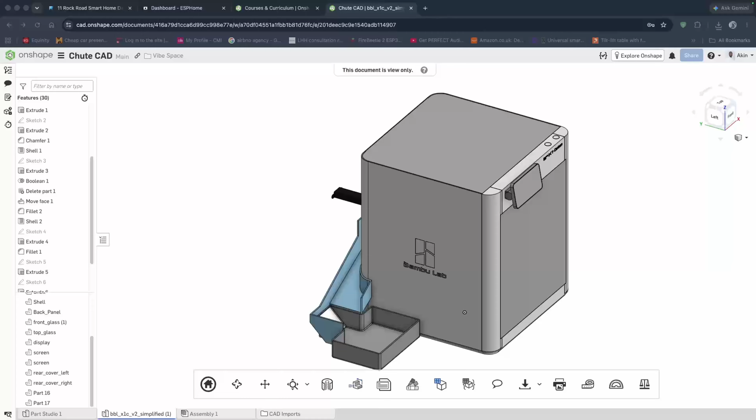In this Onshape tutorial, we'll be creating this XS Filament Chute for the Bambu Lab X1 Carbon. It's going to be a two-piece design with a collector basket and the main chute that magnetically attaches to the back of the 3D printer. So join me as I walk you through how you create a model like this in Onshape.

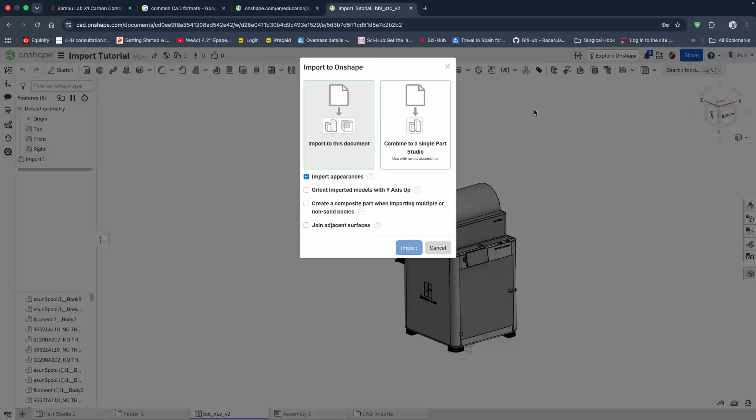So to actually import the folder, we're going to navigate back into Onshape now. Once that file is downloaded, we click on the plus button, navigate to the file we wanted, and Onshape brings up an options window. What you want to select here is 'combine into a single Part Studio', as that's the simplest thing for you to do. This combines all of the parts into one single Part Studio.

Those three tick boxes there, I would say you can probably ignore. Sometimes I like to click the third one, 'join adjacent surfaces', when I'm downloading a PCBA, because those tend to have a lot of little parts, and it helps to shrink it down a bit. Otherwise you might end up with thousands. But none of these three are important in any way. You can click the first one if you have a color that you want to bring in.

What you need to do is click import, and you can see the little bell shape there as Onshape is working and importing that folder. And now that file has been imported, and you can see it here. This is the STP format.

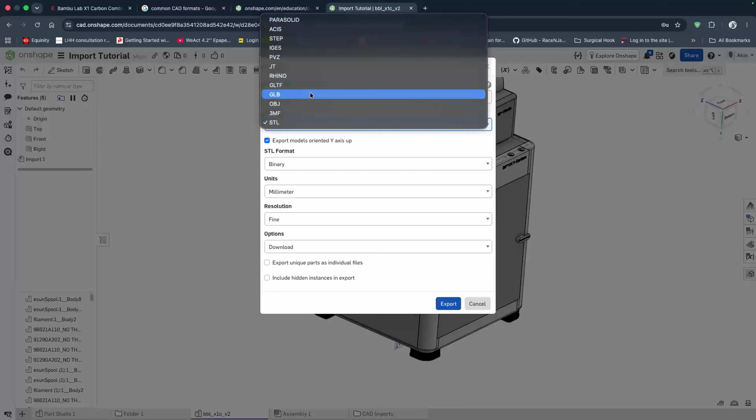To illustrate what I was talking about earlier, I'm going to export this out of Onshape by right clicking on the tab and clicking export, exporting it as an STL. I'll select Coarser for the resolution, export that out, and then import that back into Onshape as an STL file, just to demonstrate the flexibility you get with these two file formats.

So I'm going to click the plus sign again and select the STL file. You can see the difference in the file formats here - the top one is STL, the bottom is STP. You click import, and Onshape gives you a more limited options window this time, which is pretty much just to select the units. I've already deleted some of the parts I don't need on my STL file.

To do that, all you have to do is right click on the parts in the Parts section, right click on the part you don't want, and click delete, or select it and press delete on your keyboard.

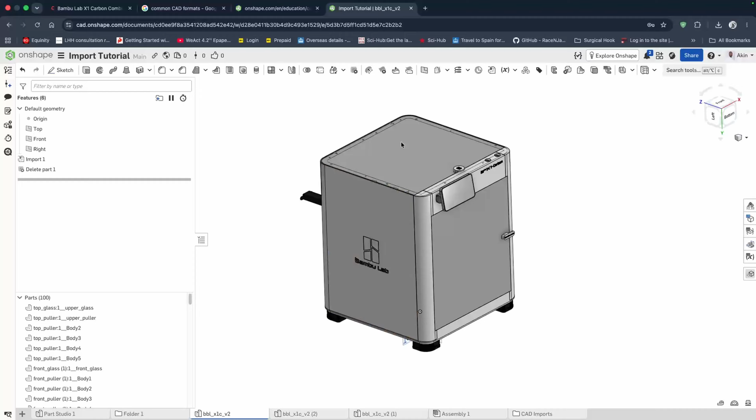So as you can see now, this is just a mishmash of triangles. There isn't really much to select here. I've selected sketches, and the only thing I can really select there is just the planes. I can't select any of the faces to do any sketch against.

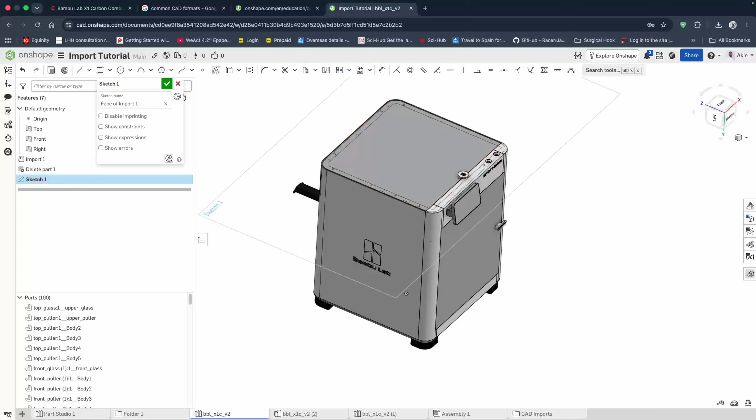If I go back into the STP file, you can see now that all of the faces here are selectable. So I've just created a plane and I'm about to create a sketch on that top face. I'm going to project a sketch on one of the features there, creating a circle out of that handle, and actually draw a circle on the top and extrude it.

Just showing you some basic features, a basic demonstration here. As you can see, I'm able to actually sketch off that surface and make significant edits to that part. And you only get this by using the neutral formats I talked about earlier - STP, IGES, and Parasolid. If you want a lot of flexibility, I would say avoid STL files.

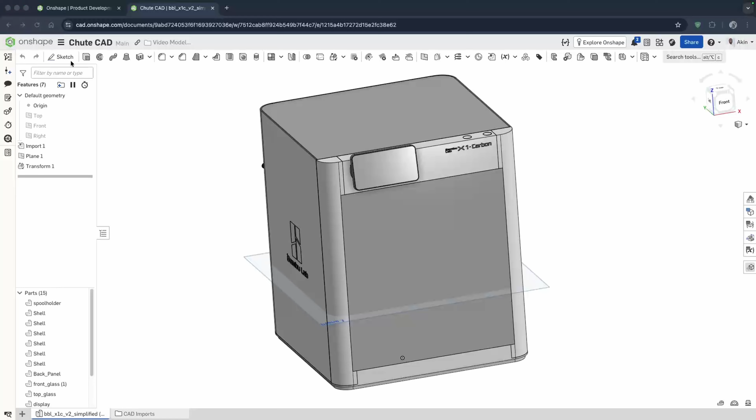All right, let's get back to the modeling. All right guys, let's get into this. I will be using an existing model of an X1 Carbon here to actually start off my sketch.

So I've offset this plane here by about 150 millimeters, from 50 millimeters from the bottom of the printer up to roughly where the position of the chute is. And I'm going to use the project sketch feature here to actually map out the initial edge radius of the printer.

What you're going to see me do here is offset that by about 1 millimeter - or is it actually 0.5 millimeters, actually looking at this now - to map that so it's not on the same plane, not on the same position as the actual printer. But I think I will change that later on, let's continue.

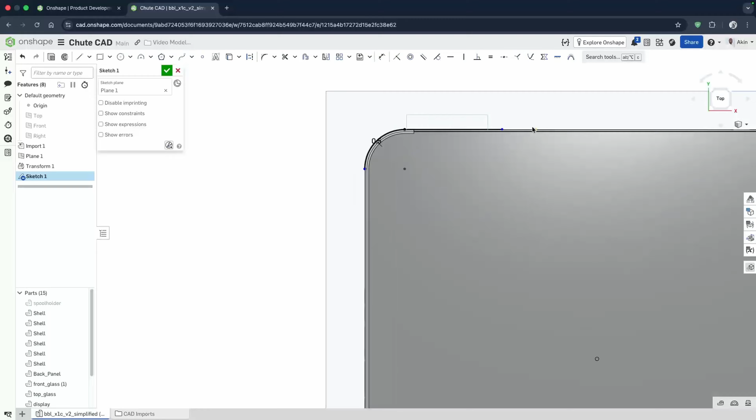Then I'm going to set up the initial chute sketch for that side. So I'm placing my dimensions - I'm on this channel, I'm big on constraining your curves, right? We don't want to see any blue lines here or any blue dots.

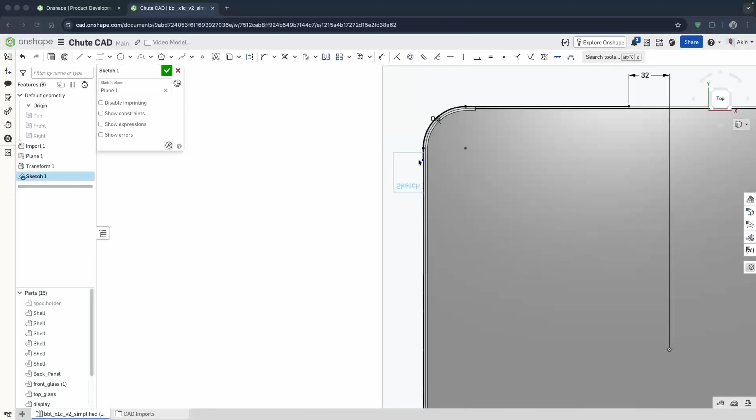That's been set up right now. And then I will put in an offset tangent there. So now I need one more to actually map the vertical position of that point, which I've done to be about 151 mil from the origin.

I'm placing both of these dimensions from the origin. Next thing I'm going to do here is just draw that out roughly to the position where I want that to go. So the chute itself is probably going to be about 140 mil away from the printer, right?

That distance represents not the final width of the collector basket, but where the collector basket will interface with the chute part. So that's what that means - I just need a bit of space there.

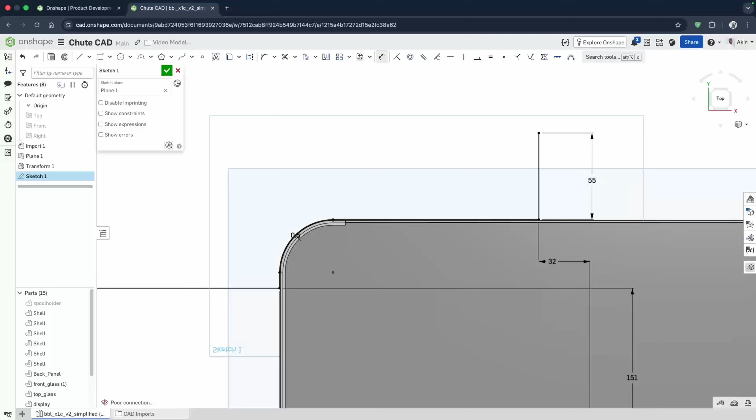So I'm still working on the sketch for the chute, and then I'm going to try and close this off now. I would use a horizontal constraint there to make sure those two points are level. And now I will close that off for a fully constrained sketch.

Next thing we're going to do is extrude this down all the way to the bottom of the printer. So I will extrude up to the face here. You can actually see as I rotated back here where I actually placed the plane of the cuff, of the sketch - it's just right at the bottom of where the chute ends.

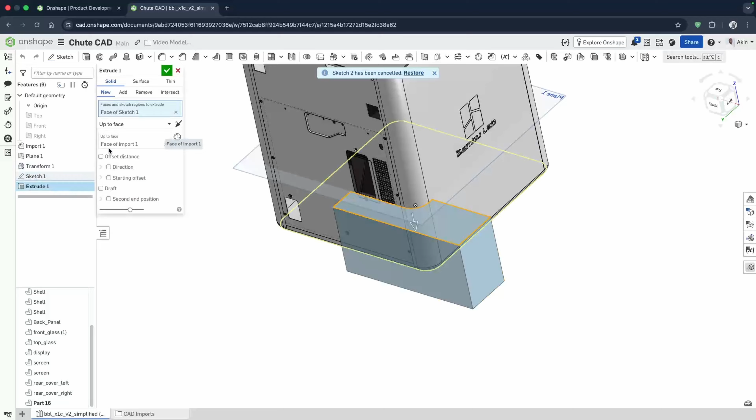So yeah, but I actually also want that to go kind of up and down that. So I've added a second direction to the extrude to actually go roughly to the upper third of the chute.

Next thing I'm going to do here is set up and extrude a sketch that I can extrude cut off, but that kind of gives me the slope that I need. So you can see there's a slope to this line here.

Over the next couple of moments, I'm going to be constraining that so it is fully defined. And then what I will do is extrude cut that up to the face of the printer, and that gives me the slope for the chute.

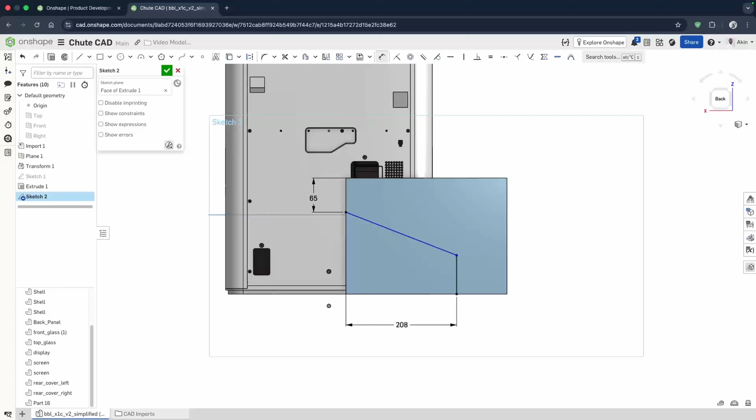So I'm placing my dimensions right now in the right places. I think I need an angular dimension here, which I'm about to do, or which I will do soon after I've placed the height. Actually, okay, I didn't go with an angular dimension - I went with just constraining the heights here, and that again gives me a constrained curve.

So I'm now going to do the upper part of that chute. What I've done here is I've placed a parallel line, so the two chute lines are parallel to each other, which constrained that line. But I have two lines because there's an upper part and a bottom part to the chute.

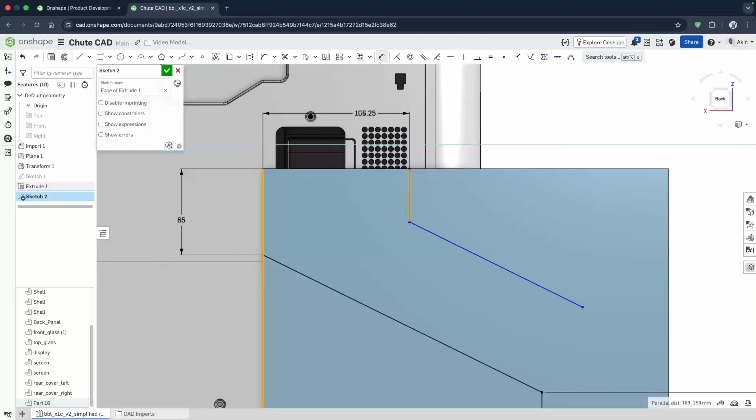You don't actually need that whole block that I've currently drawn. You could have achieved this with a chamfer on both edges of that block, but I'd like to, as much as possible, work with sketches because I feel like I can control that a little better.

Right now what I'm going to do is finish completing this curve so that I'll have two complete enclosures on the original extrude. The idea is that what will remain is just the areas in between the two regions of the sketch itself. So that's the plan here.

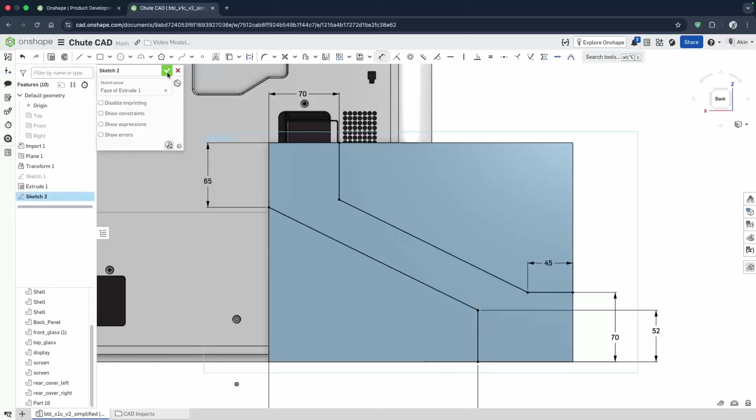So I'm just constraining those curves now. I think I might make a modification on the original one - actually, I didn't. Now that those are closed, you see the two areas at the top of the curve, so I can extrude cut that all the way to that surface, which leaves me with just the main body of the chute itself.

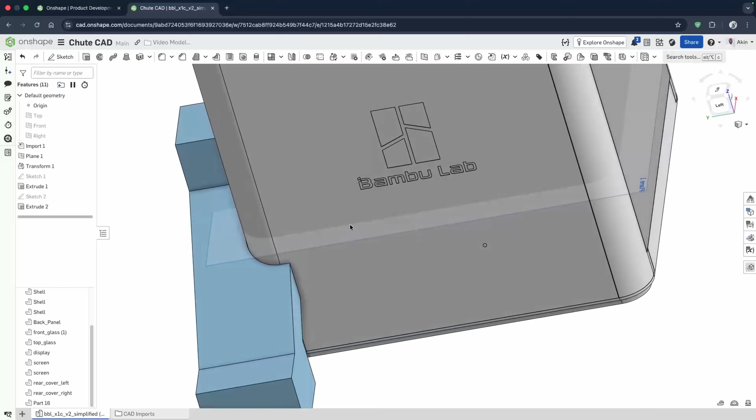Now that I have the block shape of the chute, I need to create the internal channels of the chute itself. To do that, I'm going to use a shell feature.

But before I do that, I'm placing a little chamfer - you see where I'm placing it now at that edge there. That chamfer is where the collector basket is going to merge, it's going to meet the chute. I place that first because I don't want to do any internal chamfer afterward to match the outside chamfer, which is always important when you shell.

In hindsight, I think I probably made this shell a little bit early. I should have probably completed all of the outside of this block before actually creating the shell, but I didn't meet some of my rules there. But now I've done the shell.

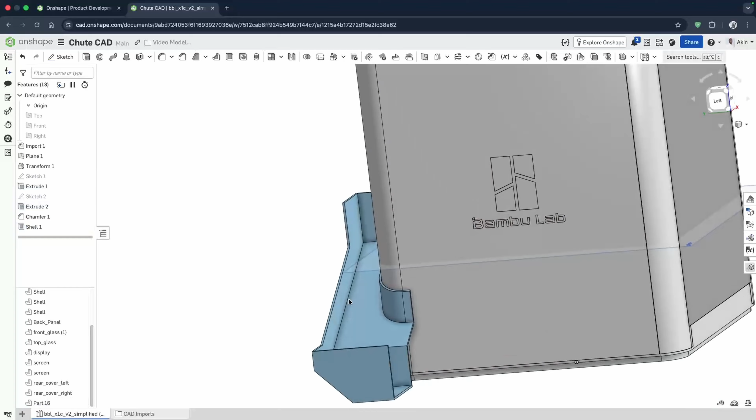Now you can see the internals of the chute itself. I've just dragged that variable up that I created for the wall thickness so I can easily change it on the other part, and dragged it to the top so it can now be used in the shell feature. I've just added one last part there as part of the shell feature.

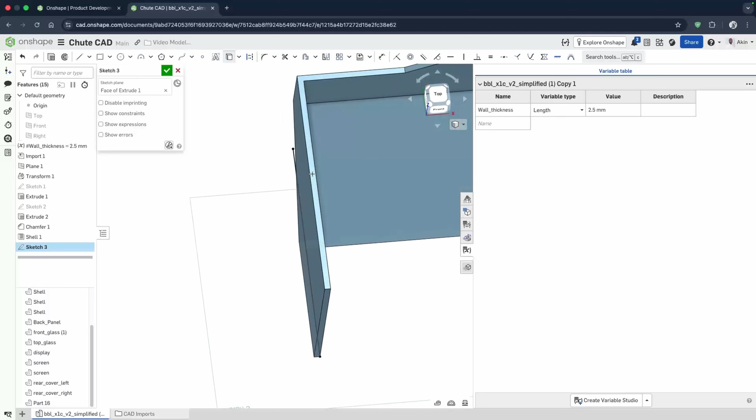So now that that's done, I can start creating the part for the collector basket. I'm going to draw a rough shape of what the collector basket looks like. As I mentioned, the collector basket is going to have a chamfer that matches that internal chamfer there, but I'll walk you through how to create that.

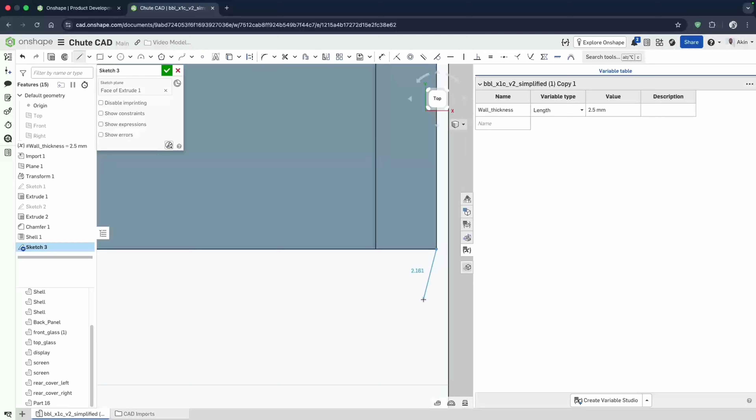The first thing I'm doing here is creating the sketch for that second part. I'm creating the rough shape, getting it all the way to the end of it. I've zoomed in here so I can capture that edge of the chute part.

Now that that's done, once I've done that, I don't actually need to constrain - actually, I needed an additional constraint, so fine, I suppose I needed to in that scenario. Then I'm just going to create the rest of that sketch there. So that's done, I've completed that all around.

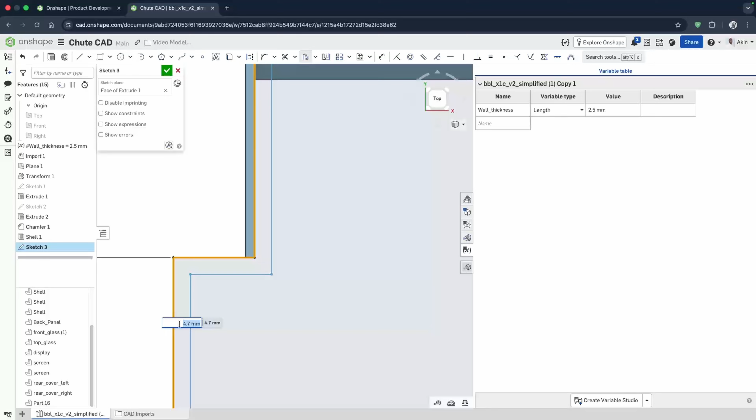Now I'm going to give it a size so I can constrain this sketch. I'm not sure how big I want this to be - I think I changed this a couple of times through the design. I can't remember the final dimension I settled on, but this is based on your table and the amount of space you have, so use whatever size is comfortable for you.

What I'm doing now is offsetting that initial sketch I made, because I want this to fit inside of the chute part itself - where that chamfer is, I need the collector part to fit in there. I've given that a good offset, about 1 millimeter, so I don't ever have to worry about that not fitting, because these are big pieces of plastic, right? So you want to guarantee that as much as possible.

Again, because I created that downstream of the sketch, I have to move it upstream of the sketch so that I can actually call that feature there. I've addressed this topic in previous videos when you're using variables in Onshape. So now that allows me to actually create a block extrude of the collector basket.

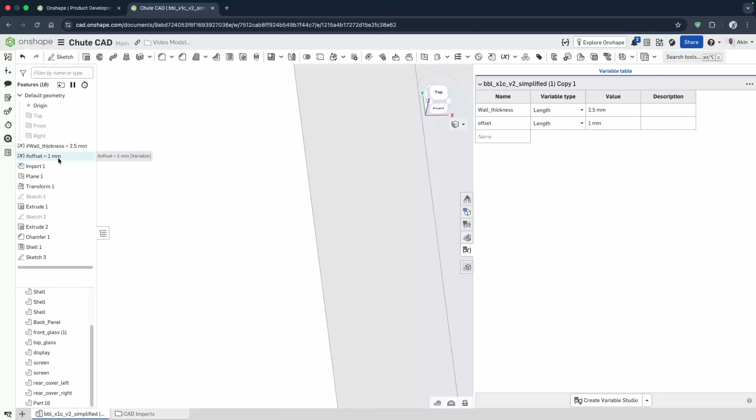What I'm doing is just renaming some of my sketches, because that's one of the things you should always do, as it allows you to find your way a little better. I'm just going to quickly rename all of those 3 sketches there. Up to you, you don't have to do this step, you can just ignore it if you want.

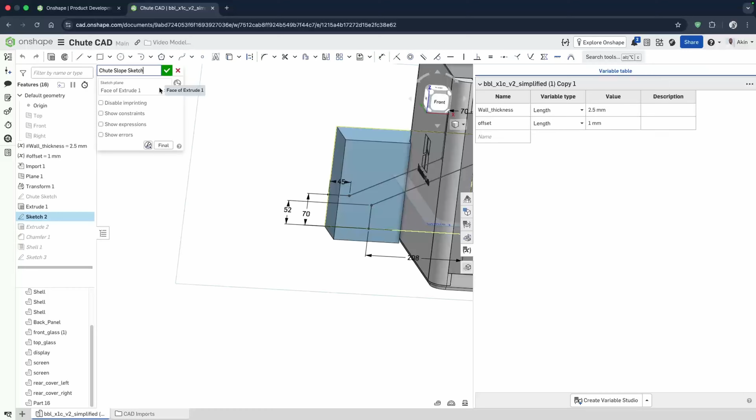So I've renamed the first one the chute sketch, and this is the sketch for the slope of the chute, and then I'm going to rename this last one the collector basket. I can't remember what exactly. Okay, I did give it collector sketch, so that's that there.

By offsetting that initial sketch that I made, I can pretty much guarantee that this is going to fit inside of where I need it to fit, and I don't have to worry about any interference being too big, because that's a massive piece of plastic. So I want to guarantee that it fits. So now I am just extruding the rough shape for the collector basket here.

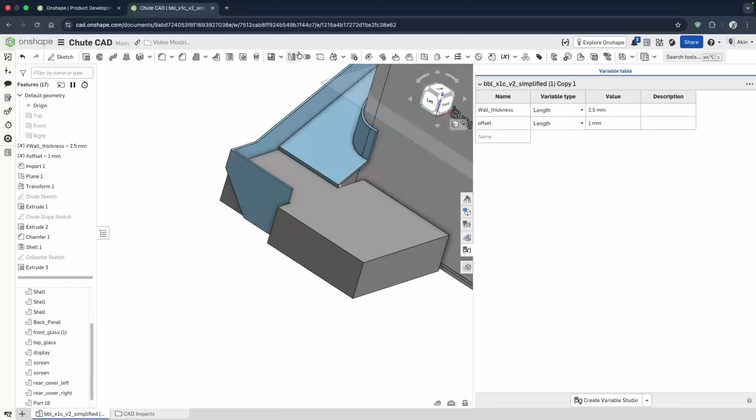So what I'm going to do next is use the boolean feature to subtract the collector basket from the chute. But watch a tiny detail here - I'm actually going to keep the tool, so I want to retain the collector basket. So 'keep the tool' is ticked. This removes the collector basket from the chute, leaving the part that's not inside of the chute body.

So a new partition has been created there, and it's just a case of me deleting that. Now the chamfers at that edge are matched. What I then need to do is make sure that's not size for size, so I need that to also be offset away from that edge there.

So I'm going to cheat a little here and just use the move face feature. I don't really like using that feature, but sometimes we're all going to take shortcuts, right? So I'm going to use the move face feature to offset that by 1 millimeter, and I'll call the offset variable here.

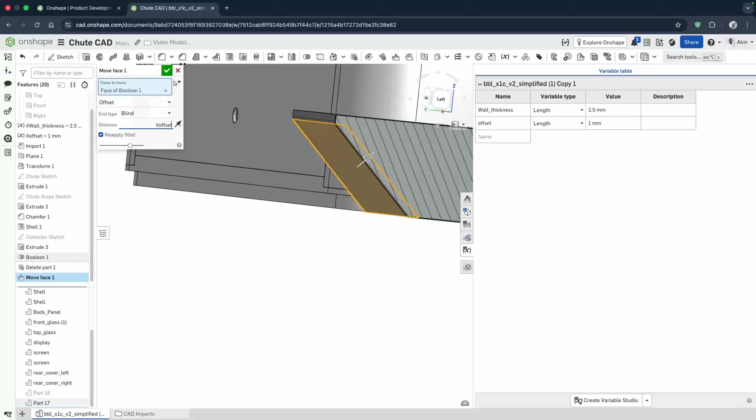So now that's spaced away from that part there, and that's to guarantee that when it's printed, it stays below where the slope ends, so that everything falls in and I don't get any expansion or shrinkage as part of the print. So now I've just removed the old feature, since I really don't need that part anymore.

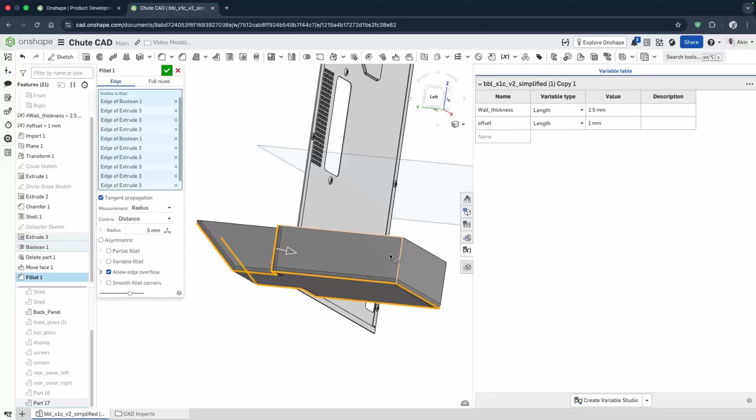And now what I'm going to do is shell the collector basket, and before I shell that, I didn't make this mistake this time - I added radii to all of the outer edges, so that when I shell it, the shell takes into account those radii, and I don't have to do any internal radiuses around that. It's just a nice little shortcut that saves your life.

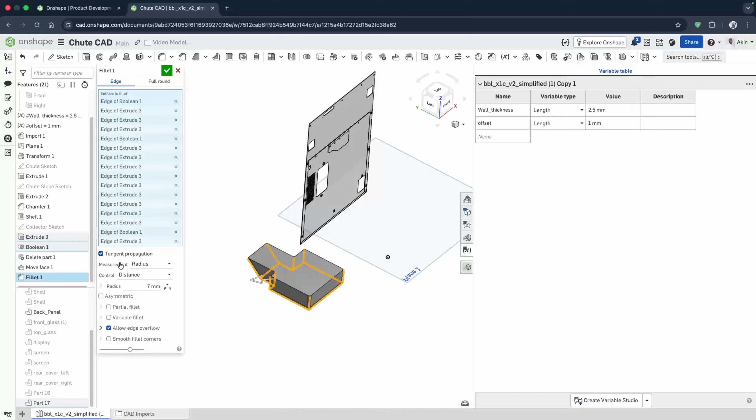It might not matter too much here because this is fairly simple geometry, but when you're doing complex geometries and you want to mirror your outside radiuses on the internal parts, this step is quite vital. So exit the sketch, exit the radius, then shell, and now you can see all of the radiuses I created around the outside are replicated on the inside without me having to do any additional modeling.

Now you can kind of see the makeup of the actual design itself. So we've got the chute, and we have the collector basket.

What I'm doing here is just adding a wall to the end of the chute, so that I only have one path - when the excess filament is falling, it doesn't come across that side and end up on the floor. I think even in this case the collector basket might catch it, but it's always better to put a design in so I don't make a mess when I'm printing here. So I'm just going to quickly add that wall there, and I know the wall thickness.

Again, I'm just going to call that wall thickness feature there, which is the 2.5 millimeters.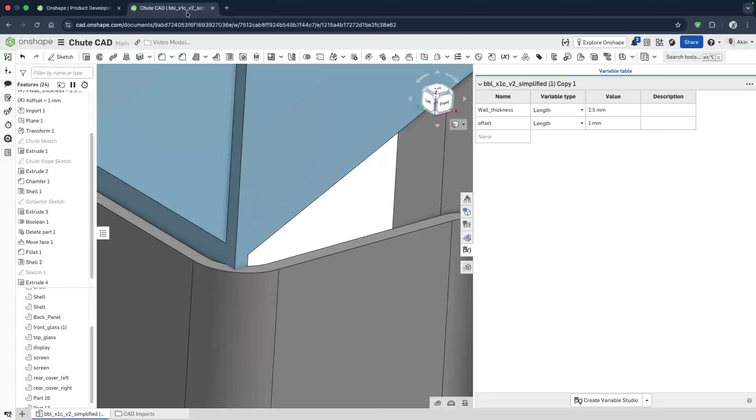And then just add that to that. So now I'm going to exit the extrude here. Now that wall is created, and the last thing I just need to do is just chamfer that edge there, so I have some clearance on both sides of the collector basket.

Actually, I'm going to make that as big as I need to, because these are big pieces of plastic, right? You want them to fit, so you want to somewhat guarantee in the modeling that there's always clearance between these parts. So I'll just increase that radius until I get the amount of clearance that I want. I think now I've got it, so I'm quite happy with that.

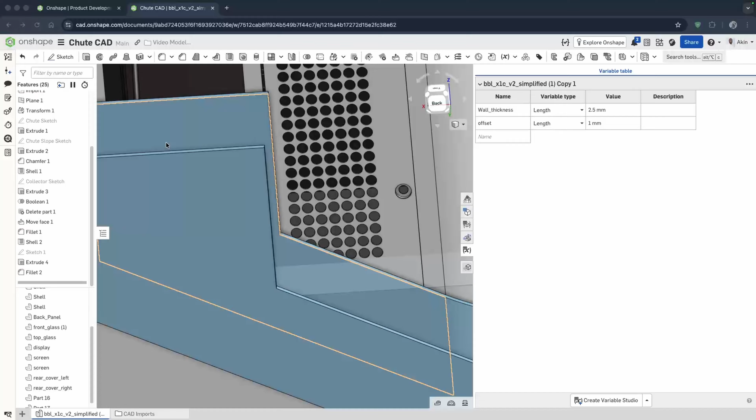So now the basic part is actually formed. I've got the two parts that I need: the collector basket and the chute. So the next thing I'm going to do is create the opening for the actual excess filament. As you can see from the CAD right now, the upper wall is actually blocking the chute.

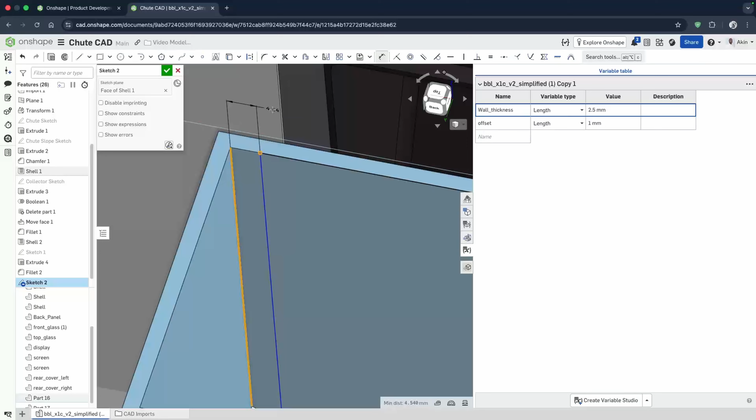So I'm just going to do a quick sketch there. I'm going to use that top edge as the locator for it. Again, it automatically constrains the curve towards that, and I just add a couple of dimensions from the sides. I wanted it to be kind of symmetrical, to be equal, so I played around a little bit until I got the dimension that I wanted. I think it was probably about 5 mil on each side.

Obviously then we need to constrain the height of the opening itself. What number did I end up here? Let's see, yeah, how about that? 65 mil — I think, yeah, that's red there because I selected the wrong dimension. I wanted to dimension the height. So, okay, it was about 70 mil.

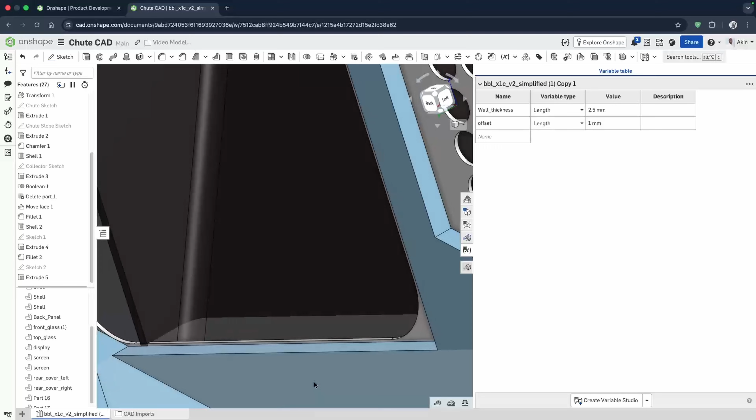It also needed to be short because I actually wanted to kind of kiss the bottom edge of that slope there, right? So that it doesn't go below that and risk anything getting trapped in there. So that's perfect right there.

Yeah, and then I think that edge probably needs a bit of a radius. And actually, did I move that up? Okay, yeah, it looks like I moved that up there. Oh, I moved it down further. So it's, yes, you're right, I moved it down further. So it's actually kind of below the chute side because you don't want that getting stuck internally.

I don't think it'll have made that much of a difference, but you know, we're seeking functional design here, so it's absolutely necessary. And I'm just renaming that sketch there so that I can easily find my way should I ever need to edit this. So I've renamed that the chute opening.

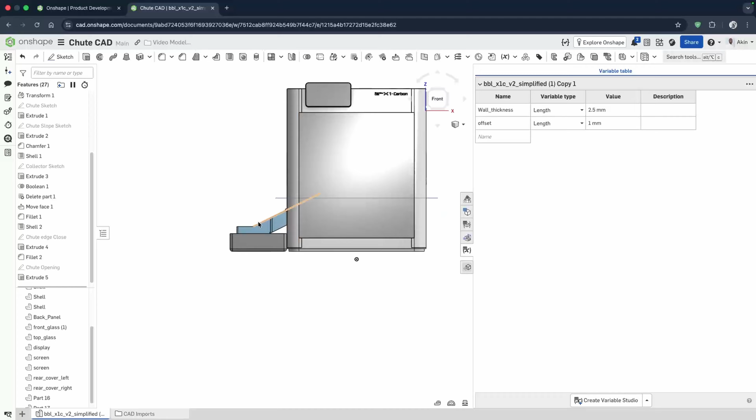So the next thing I'm just going to do here is extend the left face of where the chute touches the printer at the back, just by a tiny amount, just to give that part a little bit of strength. Because you can imagine that's a weak point there, isn't it? It could just be something that can easily snap off.

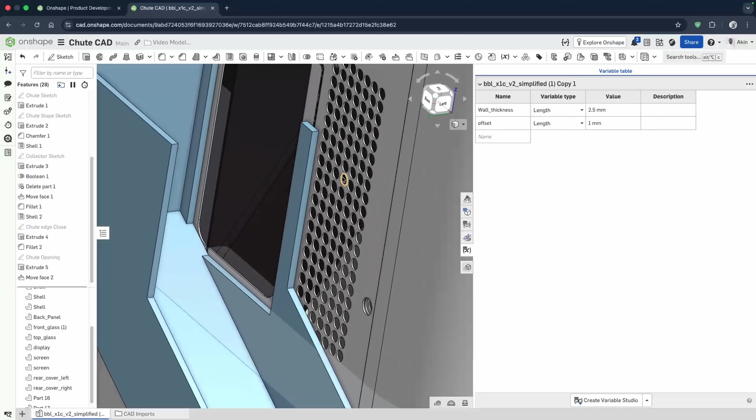So I'm just going to extend that just slightly, but not enough to actually block those vents at the back of the printer. But that's totally optional. It wasn't strictly necessary, but I did it anyway.

So the next thing I'm going to do here is start looking to add the dowel pins that actually connect the collector basket to the chute.

This process here, I would say you can skip it. I think for me, sometimes in engineering, you want things to actually go where you want them to go. So for that, you need to actually add features that enable that.

So I'm starting with a sketch on just one of the horizontal faces. You can pick any face here, whether or not it's on the basket or the chute. I'm just going to dimension that circle and extrude that out.

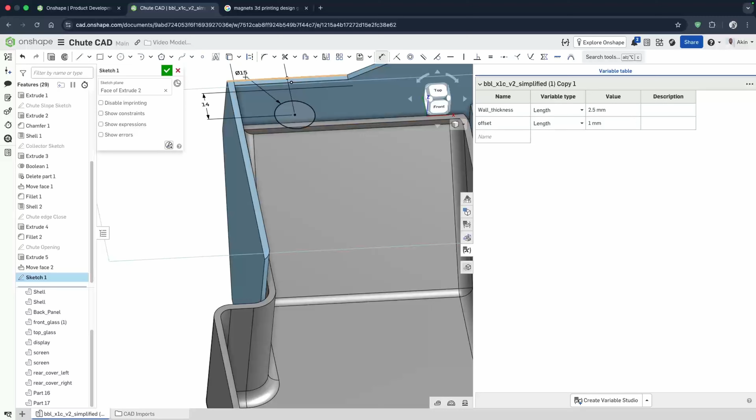But the extruding here will only be on the collector basket. So I would select that when I'm extruding to only actually merge that to the collector basket and not the chute itself. So that's what I'm doing here. So that creates just a shaft, or a dowel pin, as the kind of male part of this connection.

So right now I'm just going to adjust that just to the right length. Again, you can choose whatever you want here as long as it's not touching the base of the rig. And as you can see here, I've adjusted the merge scope to only actually be just for the basket and not for the chute.

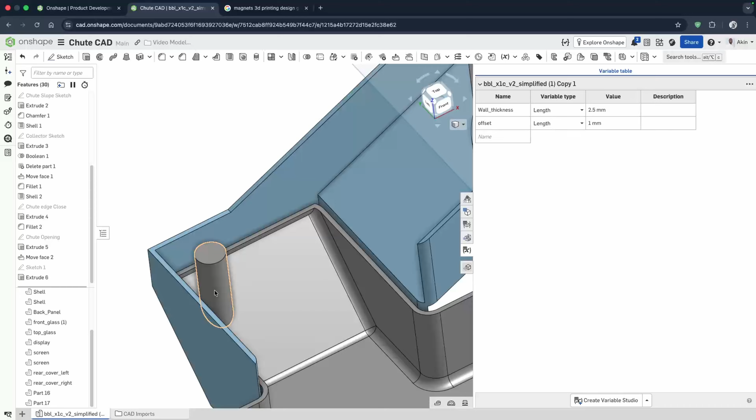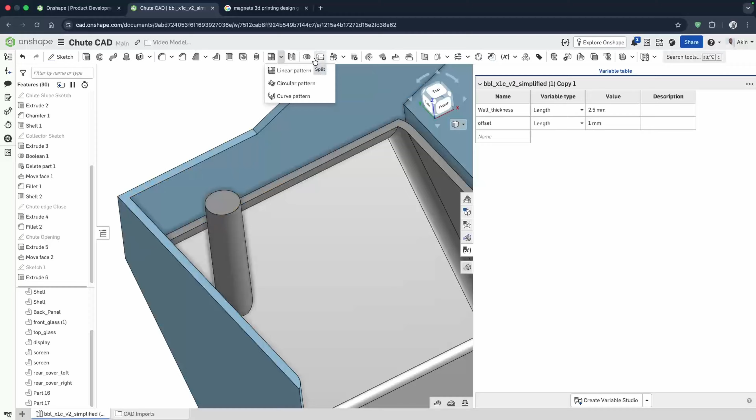After making a tiny adjustment here to the diameter, the next thing I'm going to do is pattern that horizontally across the face of the basket so that I have two of that feature. So we're going to click into the linear pattern feature in Onshape and select feature pattern, not part pattern.

So we select the feature that we want, which is the extrude that we made, and we use that edge as a direction, then set the horizontal distance. One step I'm going to take here is to create a variable to control the distance between those two dowel pins. This is quite important given that I have multiple parts here, and I'd like to replicate that part on the chute.

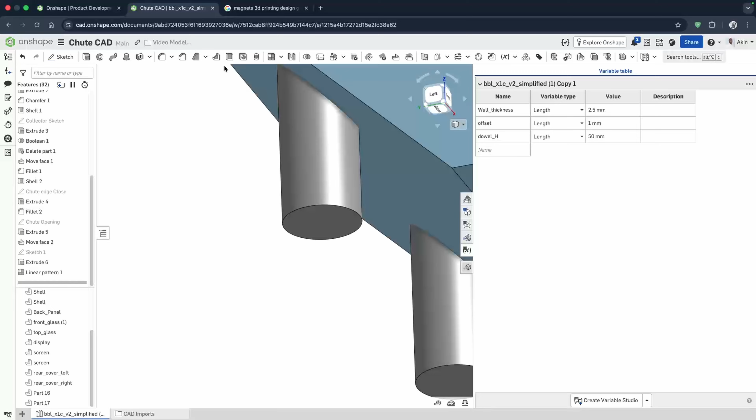Creating this variable allows me to update that feature from the variable on both parts without having to undo features within the sketches. That's one advantage you get from doing that. As you know, on this channel I love creating variables because it makes your CAD a little bit cleaner.

Now that those parts are created, I'm going to replace face it because I don't need the top part of it, so I'm replacing that with just the slope. That top part goes away, leaving only the bottom pin. Then I've added a chamfer there to make the insertion into the corresponding hole on the chute easier. It just gives it a bit of a lead in.

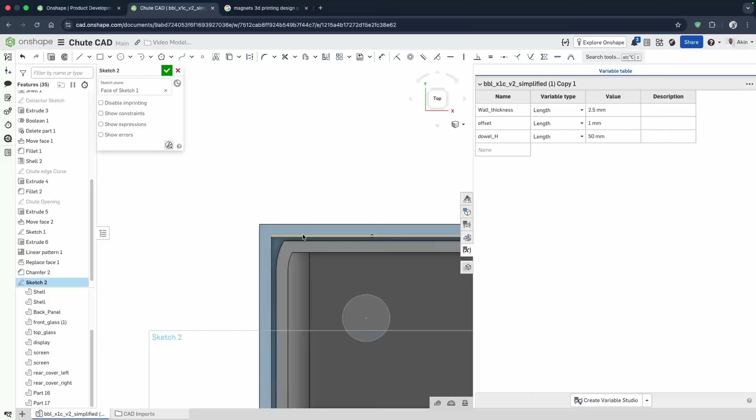While inserting it, so next I'm going to create the female part of that on the chute. And like everything we do in Onshape, it starts with a sketch. I could have nested a lot of these sketches into one, but I chose to separate the sketches a little bit.

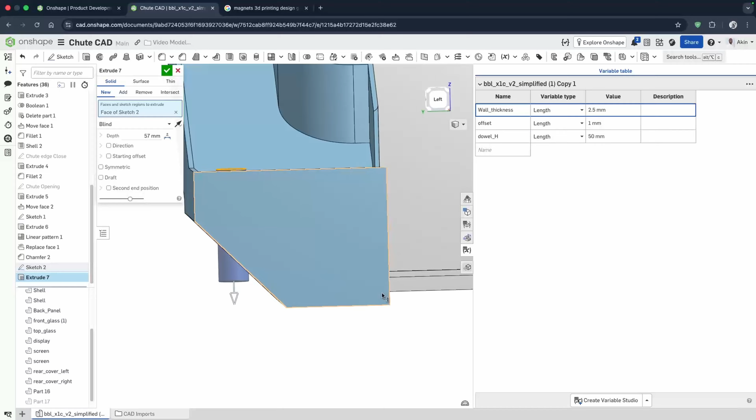The first thing I'm going to do here is use the offset feature to offset my previous sketch, and I've given it a wall thickness because the hole we're going to create itself also needs a wall around it. I just don't want it to be like a hole in the middle of the chute. So I'm creating the wall for the hole, and I called the wall thickness variable I used earlier because I want even wall thicknesses across it, which makes editing a little bit easier.

Now that that's done, I'm going to do the same thing I did before, which is to pattern this boss that I made. Because I already created a variable earlier, I'm going to call that variable right now, the Dowel H variable, and that sets the linear spacing between these two holes to match what I created on the basket.

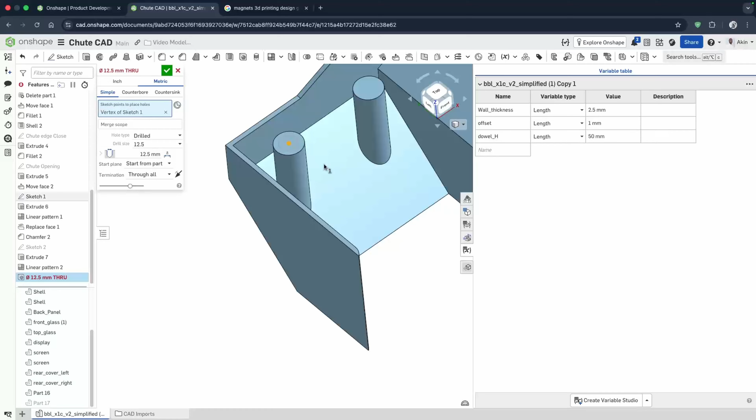Now that the walls for the hole have been created, I'm going to create the hole that the dowel pins in the collector basket slot into. I'm going to give this hole a very generous dimension. As you can see, I'm selecting about 12.5 millimeters compared to 10 millimeters for the dowel. This is because I'm not really looking for precision here, I just want that to fit, and I want to guarantee that it fits.

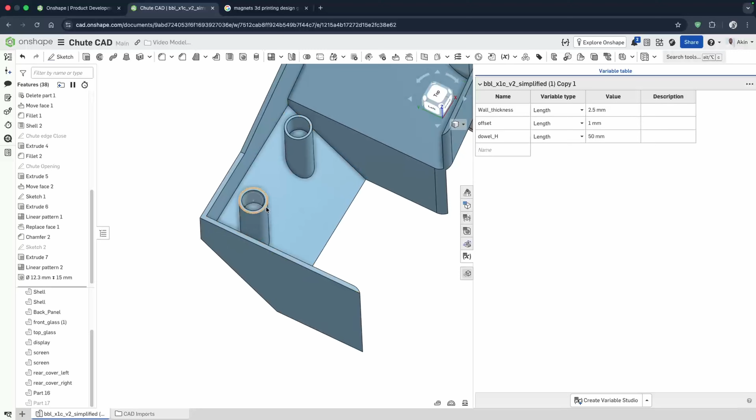This is a choice you can make, but I've gone for as practically big a dimension as I can here. It really doesn't matter, we're not creating precision machining with fine tolerances and slide fits, so the 12.5 is just fine. Next, I'm going to select the depth of the hole because I don't actually want that to be a through hole. Again, it's just a personal choice, it really doesn't matter in the long run. I'm just going to fiddle around with the depth here until I get to the depth that I wanted.

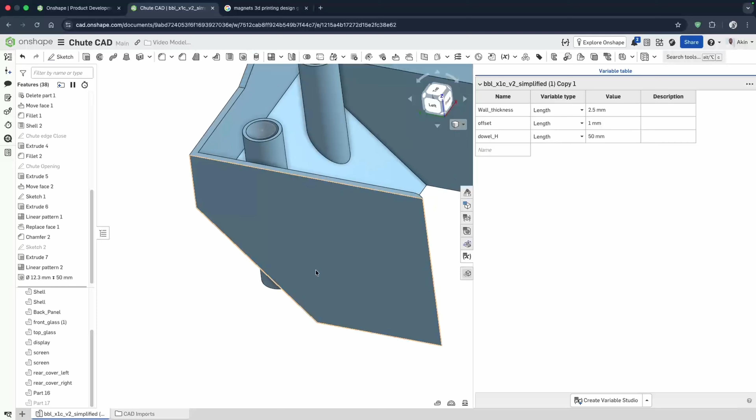So I'm going to bring back the basket now and do a section view so that I can get a clearer view of how deep this hole is to be, because I don't really want to risk anything not sitting the way I want it to sit here. So I'm going to do a quick replace face and then section view so I can get a clearer view.

As you see, Onshape did something very subtle here, as I was messing about trying to get the correct depth. As I increased the depth here, Onshape brought the collector basket into scope. I've just circled that part there in red. You can see part 17 pop into scope as the depth overlapped with the depth of the collector basket, and it was something I didn't actually spot when it happened at the time.

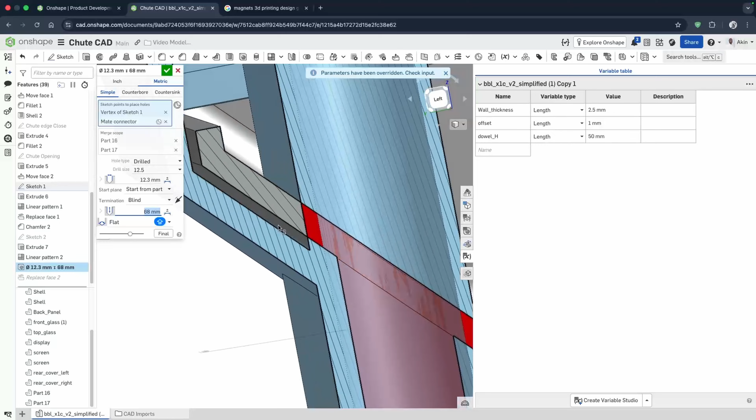So now the pinhole has actually completely disappeared because I've somewhat extruded through it by creating that hole. That's something you have to watch out for, that when you have features interfering or in the path of other features, Onshape can sometimes bring it in scope. And again, I didn't spot it.

So now the hole is created. I can now have noticed that, oh my God, my hole is missing. And in real time, I didn't actually have an idea as to what had happened. So you're going to watch me fish around a little bit trying to figure out what happened. I'm going to try and drag that feature up and around — that wasn't the issue.

So I kind of was wandering around there trying to figure out what was going on. So I then went back into that feature, the hole feature here, and just removed part 17 out of the scope of that, and that fixed it.

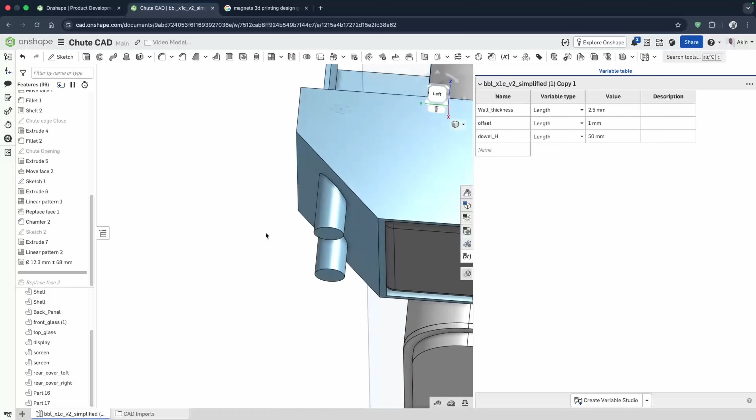Now that my hole is back, I'm just going to drag the feature bar down now to allow that replace face to come back in scope. And then I'm going to do a quick check with the section view, and you notice now that the hole on the dowel pin is back on the collector basket. So now I've just done a quick replace face, and I'm going to chamfer the entrance of the hole just to give it a bit of a lead in, and then we're just about done with this feature.

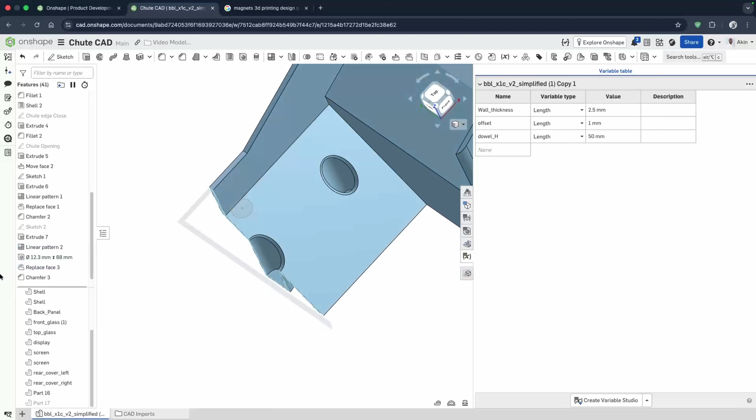As I mentioned, this feature wasn't strictly necessary, but I just wanted this to sit where it needs to sit without sliding about, because you can imagine a situation where your table is not level. What will happen is that if that's not properly constrained, your basket can end up sliding down and away from where it is. So this just helps it stay in place.

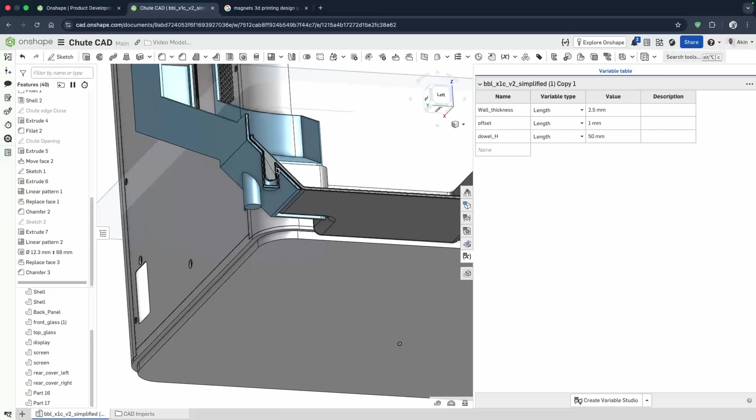And as you can see now, I've got the right holes and the right sort of clearances between the dowel pin and the hole on the chute. So now that feature is added, the last feature we're going to add is just some holes on the side of the chute so that the chute can magnetically attach to the back of the printer. I've just hidden away all of the other parts of the printer here because it was getting in the way, and I needed a clearer view of that back panel.

So as with everything, it starts with a sketch, and I'm just going to use the project to sketch feature here to get the bottom line of that chute. And then I'm going to offset that — I think I offset it in total by about... again, this is up to you, you can choose any number you want. I think I set it to 10 mil there.

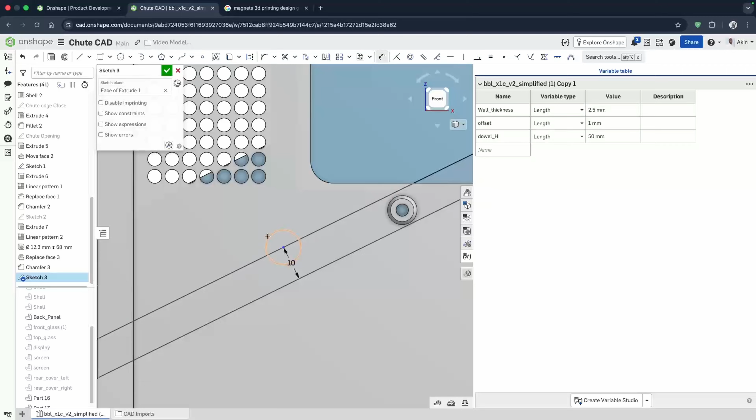And then what I'm going to do is just create a bunch of circular bosses for a magnet. I think the line around there was about 10 mil in diameter. So I set it for those.

I mean, in hindsight, you can watch as I do this, but looking back at this and at the way it actually prints, sometimes when you print this on a 3D printer you get a bit of a seam around that hole, and it makes it difficult to actually insert the magnet, no matter how much...

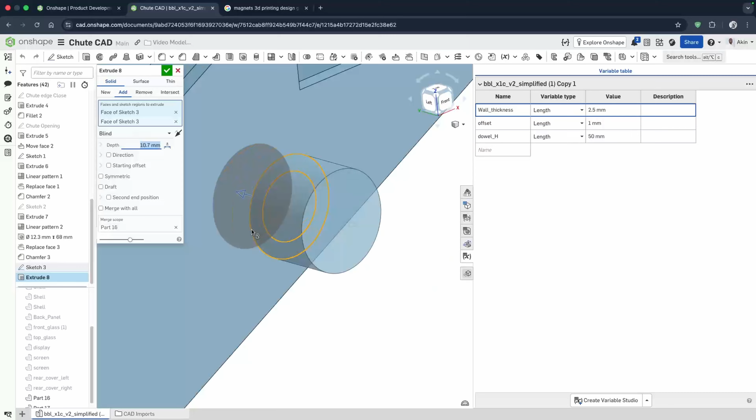To get around that, you can give it a lot of clearance, but then again, you want your magnet to sit in, right? You don't want it falling out, so you can't also make that hole too big. I noticed this while I was printing it, but I wasn't going to redo this — I just had to work with what I got, because we're engineers, it's what we do. So in hindsight, maybe that internal circle should actually be a hexagon, so you have sharp corners, and then you should have no issues getting your magnet in.

Or you could have something like a circle with a lot of clearance and have some sort of crush ribs inside of it that actually give the magnet some retention. So just keep an eye out for that here.

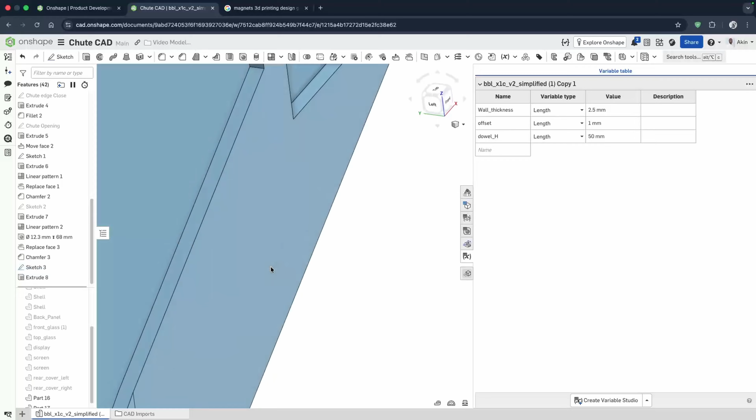So what I've just done is I've created the external diameter of that hole there, where the magnet sits. I'm going to use the hole feature to create the internal diameter of that hole. I'll select the center there, use the mate connector since I didn't spot it in time, and then change that to the diameter of the magnet with some clearances.

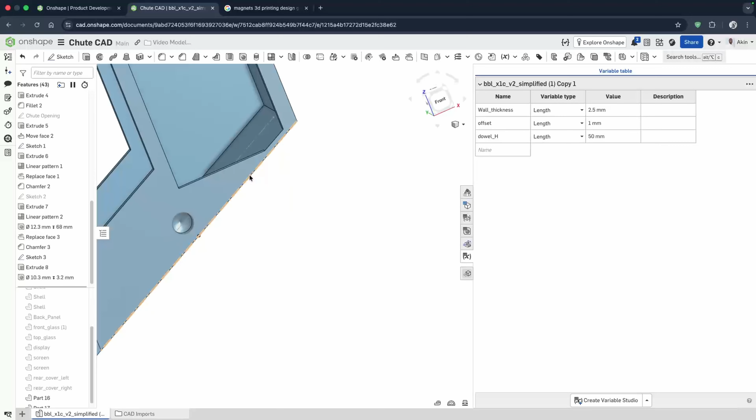I'll mess with the depth here to make sure the magnet is actually sitting in, but for a 10 mil magnet, I settled for like a 10.3 mil diameter here, just after some experimentation and test prints. Keep in mind you're probably likely going to get a seam around that, so you may want to make that internal diameter like a hexagon, or use crush ribs as I mentioned.

So now that the first hole is done, I'm just going to pattern that. Because I want 3 of them, I'll do one pattern across that line there, using my sketch line as a path, and this will be a feature pattern again. The direction will be the line there, and I'll offset that so it goes back the other way.

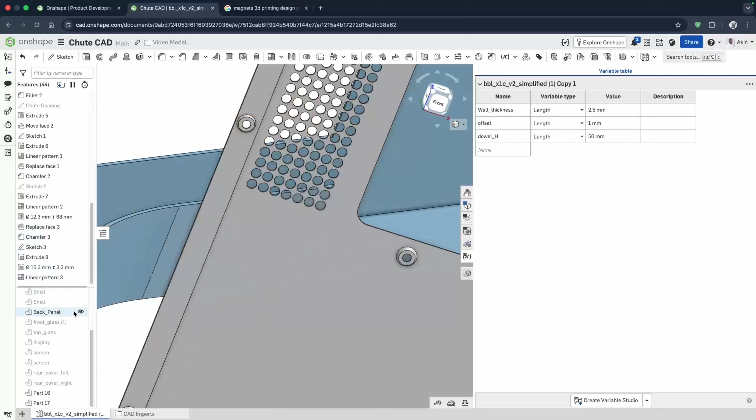Size this as you want, as you feel. I sized this because I still want both holes to be on the back panel. I played around with that a little bit to make sure they were both on the back panel, because the back panel is actually the only panel that's magnetic on the X1 carbon. The side panels are kind of plastic, so if that spacing was too much, you'd end up on the plastic part or on the curved radius, and you wouldn't be attaching to anything.

So now I'm just going to... I settled for like a triangular pattern here for the magnet. So I'm creating the path for the second magnet, and I'm just going to dimension that over there.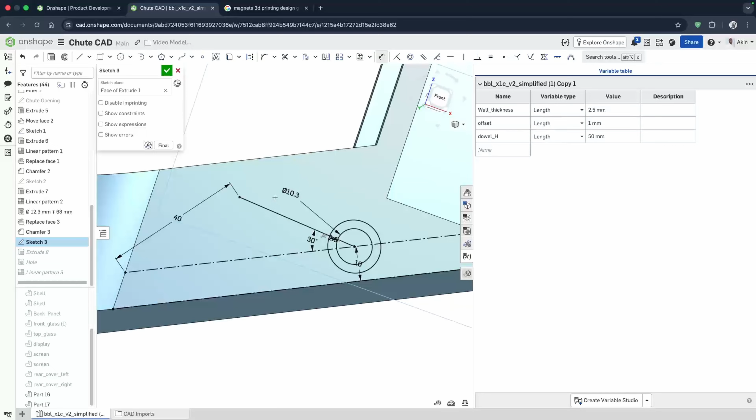We should always dimension our sketches and keep them constrained. So I'm going to dimension the edge of that line there, and I've given it an angle, and then I'm going to use the linear pattern again to do another feature pattern, but this time using that line as the path. I gave it about 30 mil just to actually space that about right onto the edge of the line. So now I've got my 3 holes for my magnet, and I will add a quick chamfer here to give it a bit of a lead in.

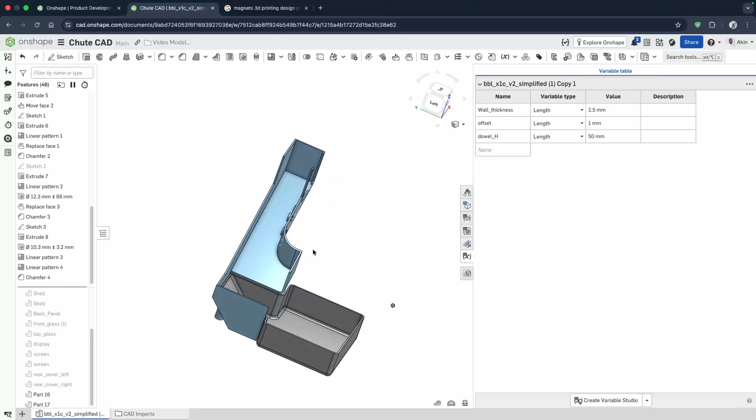At this point I thought I was done, and practically and functionally the part is complete, other than just adding a few rads. Yeah, the model is complete and where we need to be, and I thought I was done at this point.

I closed things up, sent it to my X1 carbon, and then realized the bed was too small. In a way, it's kind of one of my criticisms of the X1C, that compared to the other more recent offerings from Bambu Lab, they tend to have bigger beds. This one here was too big, so I had to jump back into the CAD to actually split that into 2.

So congratulations, you get to watch me do more CAD. But this was a fun learning experience overall, and I hope you guys are also learning from it.

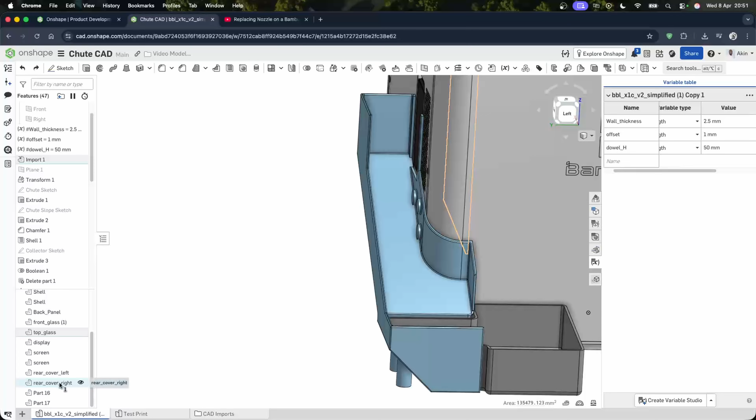So to do that, as I mentioned, I need to split this into 2, particularly the chute part, so that I can print it in 2 pieces. For me to be able to do that, I need to add some joining features at the split point. So that's what we're going to do. The first thing I'm going to do here is just put a plane where that line is.

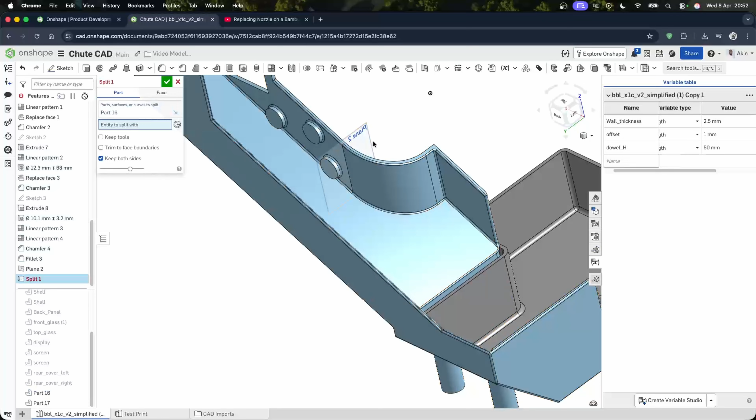I had a natural line where that curve was formed, so I use that as a splitting point. Then I'm going to use the split face feature with that plane I created there as the split point. So that's what I'm doing now here. Now we've split that into 2 parts.

We have the top part of the chute and the bottom part of the chute, and it's actually good because now that we created a plane there, we can use it to make the same sketch that will form the joining feature for both the top part and the bottom part of the chute. We just have to use one plane to do that, because it's kind of the same plane on both sides.

So what I'm doing now is I settled for like a dowel pin type joining feature. I'm starting with a sketch here of the feature, and I'm going to use the dowel feature in the sketch to create that. Sorry, it's called a slot.

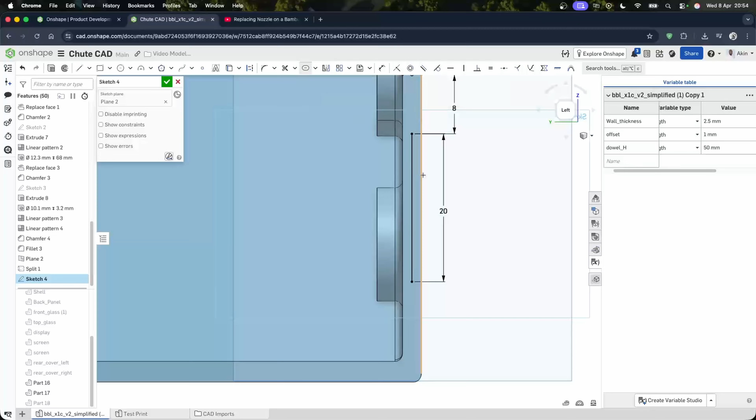To create that, I'm going to dimension it. I only need about 1 mil here so that it sits within the wall thickness of the chute. I'm going to add that midline, and the top part I believe is going to be the male part, and the bottom chute is going to be the female. I'm just moving it around there to check that I've got enough, and once I was happy with it, with the length, I would add a chamfer just to give it a lead-in at the very tip.

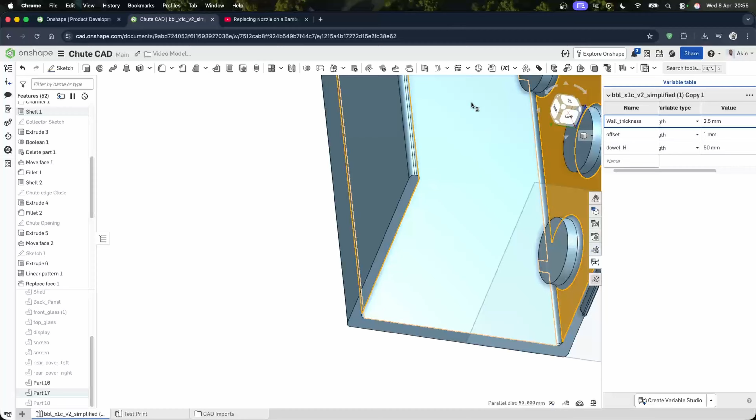Once that's done, I need to mirror that to the other side of the chute. So I'm going to create a center plane by selecting the 2 sides I want the plane around, and just select a plane, and Onshape automatically figures out that I want the mid plane. Now that the plane is created, I will mirror that feature across to the other side. Easy peasy, but remember to select both the extrude and the chamfer so that both are mirrored.

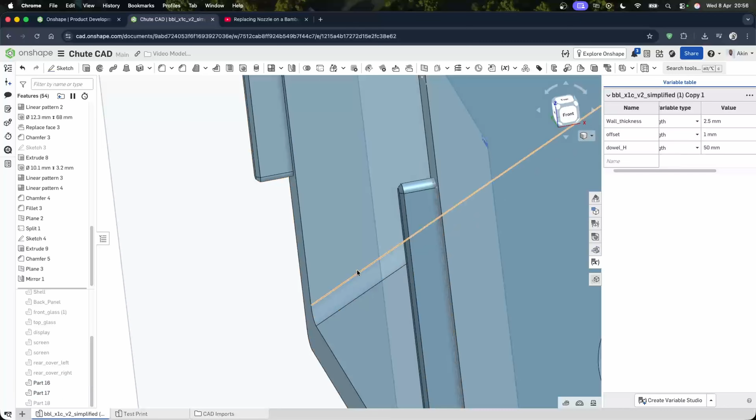The next thing is I'm going to add that top part and use that plane and the sketch onto the bottom sketch, because that plane is actually on both sides of the chute, so you don't have to recreate it or even recreate the sketch. You can just use the same sketch. So I'm creating the female part of that. This part is just going to be an extrude subtract, like a hole, and I've given that 3 mil so that I have enough depth, since the previous part was up to 2.5 mil long.

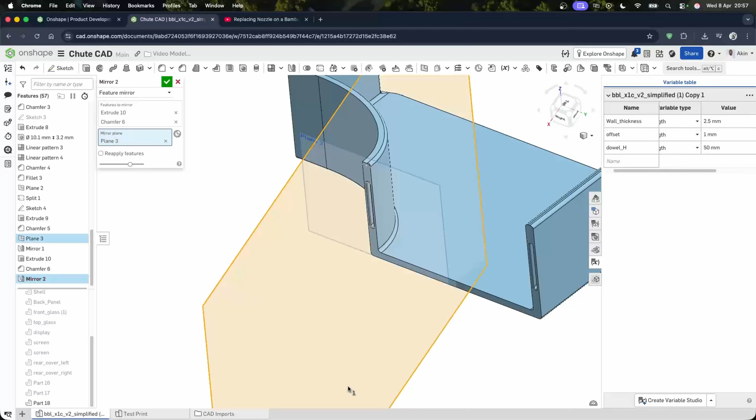Again, I don't really have to recreate any of the 2 planes. I could just mirror that across, and that's replicated. So one thing I did realize is that both of these are actually sized size-for-size, and if we go ahead and print it as it is right now, we risk it not fitting together.

So I'm going to use the rollback bar and roll it back to the original sketch and offset that outwards by 0.2. What I'm trying to achieve here is that the size of the male part stays the same, but the 0.2 offset now becomes the new size for the female part on the lower chute.

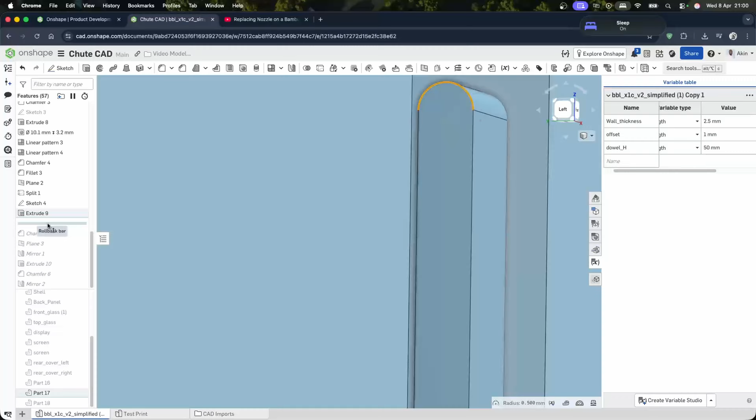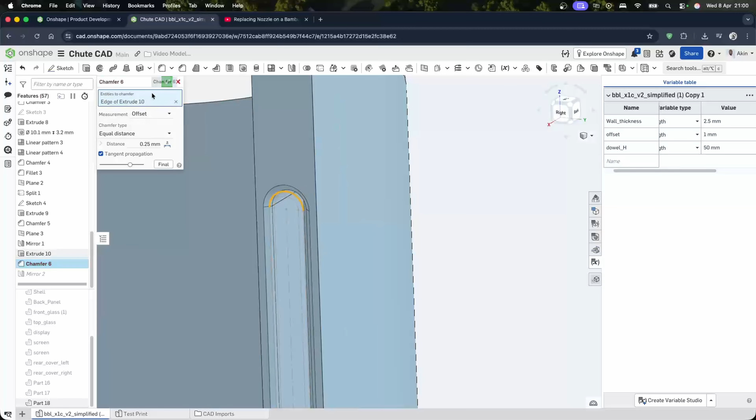So I'm going to go back now and give that back the chamfer that I already placed in. I'm dragging the rollback back down, and then moving that back up again, hiding the top chute, going to the bottom chute, and using the offset I created to make that all bigger in there. Then I need to reapply that chamfer. Now we have the right clearances between both mating parts.

So the 0.2 is sufficient here. I tested it out before and I knew that was going to work based on my current print settings. And with that, this part is complete and ready to be sent off to the printer.

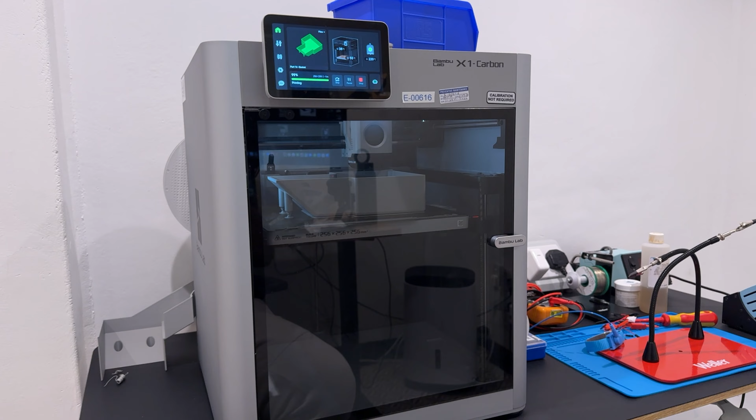So thank you guys for joining me in this video. This was a really fun process. It was actually one of my first earlier prints with this printer, so I had to figure out a couple of things along the way, do a bunch of test prints, and it was a learning process for me as much as it was for you. So thank you guys for watching.